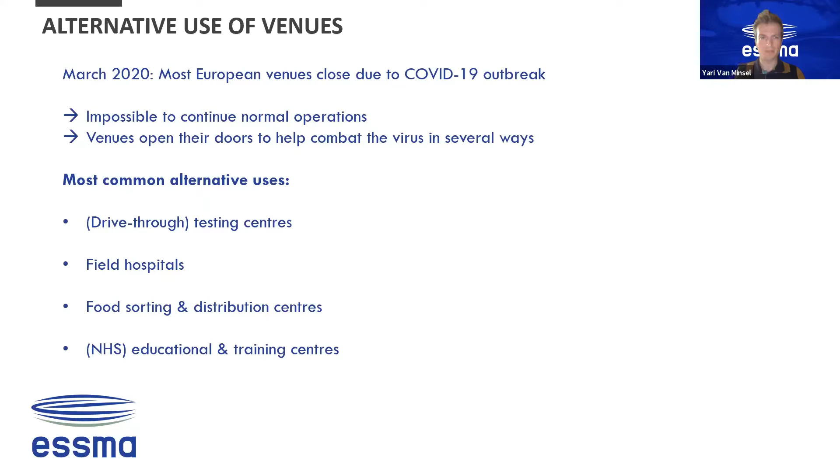They found several ways to do that, and all across Europe we saw different examples. For example, in Croke Park, we saw a drive-through testing center. We saw field hospitals in Principality Stadium, but also in the Maracanã in Brazil. We saw logistics hubs being set up, like in the United Center in Chicago, but also in the Bernabeu in Madrid.

We saw a lot of venues offering their infrastructure for the National Health Services. The O2 Arena in London was used as an education and training center. We also saw Chelsea FC offer their Millennium Hotel for NHS staff to stay there instead of going home and back to London each morning. So all venues around Europe were trying to offer their own kind of help to combat the virus.

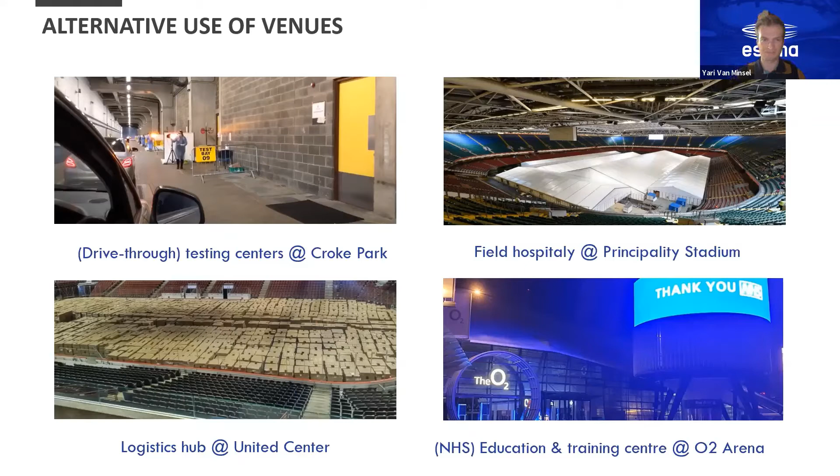As of June 2020, more and more countries were decreasing the measures around social distancing, and small crowds were once again allowed back in stadiums. Clubs were able to once again attract customers to the venue, and they had to find some creative way to do this and generate income from it. We also saw examples of that.

One example we saw in the US market was drive-in movie screenings at the Hard Rock Stadium in Miami, and the Olympic Stadium in Amsterdam did a similar kind of thing. This is a perfect way to generate extra revenue, use your stadium, but still keep in mind the measures in effect, like social distancing. We see them doing it with a drive-in system, but also outside the stadium with a large open-air patio, where people can still respect social distancing while the stadium generates revenue.

We also saw small exclusive business dinners on the pitch at FC Groningen, but also at Johan Cruyff Arena. And then, finally, we saw stadiums using their catering facilities and opening pop-up restaurants all around Europe—this is an example from NAC Breda in the Netherlands.

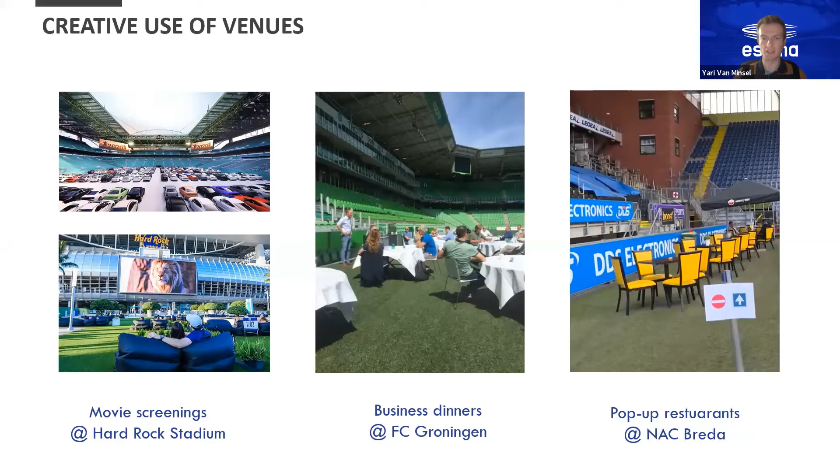Then we saw, in June 2020, that not only were venues being used again, but competitions were restarting as well. Most competitions had been temporarily halted, and some were stopped definitively. But those that were halted were restarting again in June 2020.

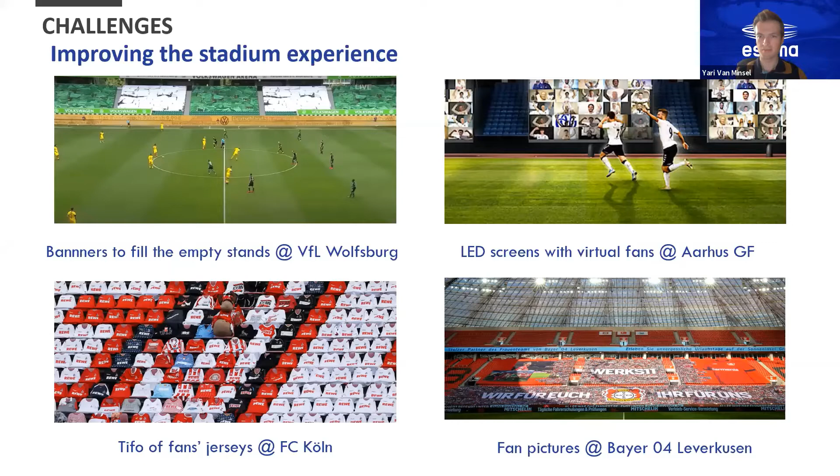Well, considering what you just saw, and knowing what Javier will detail afterwards, I find it interesting to bring three general considerations for today's discussion. First of all, I find it relevant how the football ecosystem has shown agility to implement substantial changes for the global emergency situation we have been living, mainly in two aspects.

One, the quick adaptation of stadiums as emergency situation infrastructures, with the examples from Yari, as turning stadiums into hospitals, movie theaters, COVID-19 testing facilities, etc., making them safe places.

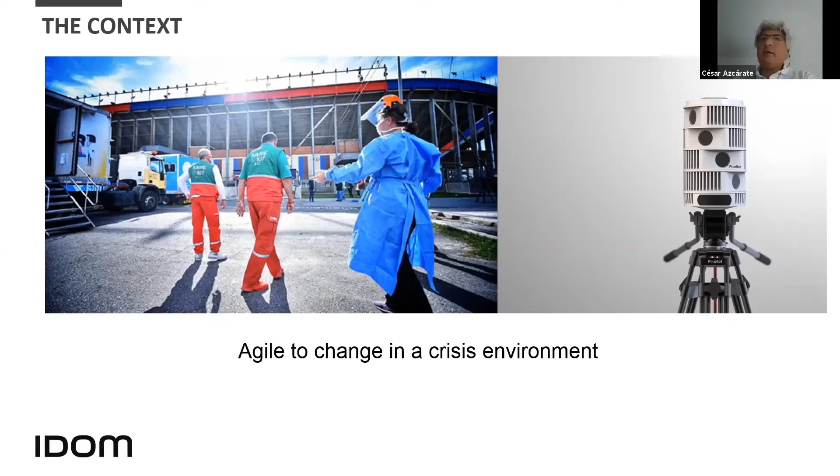And two, quick adaptation of technologies around the football ecosystem, mostly so far with the broadcasting technology, which provides the main incomes to football. We have seen stadiums being modified both digitally and physically to this new reality, the one of football without the spectators. This makes me think that our stadiums will be capable of adapting again to unknown and new situations to come.

A second thought comes from realizing the social responsibility that the world of sport has always had, and which has been further increased in these pandemic times. While the public authorities have an obligation to work on a line to adapt convention centers or to create new hospitals, I find great value in how stadiums, which are mostly private, have been capable of adapting with the same level of recognizability.

And to end with, the third comment goes to the media capability that the football industry already has, and which has been conveniently applied to solidarity campaigns, as the ones we can see here. This has the longest way ahead without any doubt. Such way ahead should be also capable of influencing the negative examples we are also seeing nowadays, as a prevention towards negative attitudes in celebration, for example, some days ago. Although good attitudes have also been seen, the media capability should be applied to avoid such bad examples.

Okay, within this frame, I will now give the floor to Javier Dávila, so he can tell us in detail which are the aspects to be considered to face the new situations, not just only in existing stadiums, but also in the stadiums to be designed yet, and which architects and engineers should evaluate and provide such services from now on.

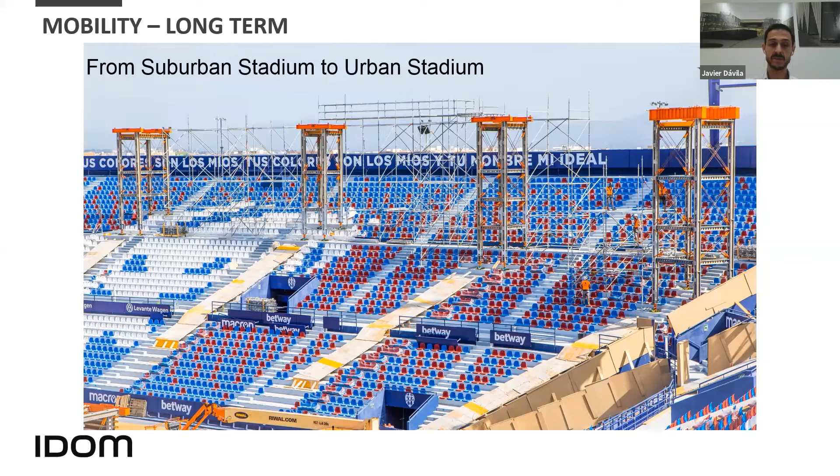But then, if we are talking about being in the city, then there is another issue that we have to address, which is the access to the stadium.

We put this example because this is a very open and friendly open space around the stadium for an access. In urban situations, this is not the common thing to happen. So the new designs for stadiums should be addressing these arrival areas and accesses to be dimensioned for this new interpersonal distance, not just as an emergency egress space as they are being managed nowadays, but more as areas where we have to engage our fans before the match and help them get into the stadium in a safer environment.

As we said, in a very similar thing that is happening in the United States venues, people have all these different attitudes to come earlier to the stadiums.

Well, those areas surrounding the stadiums, we should be addressing that design to allow for overlay requirements now for temporary situations that are coming from even temperature controls, screening. Well, those should be temporary. That's what we believe. But there is no need for renovation investments on those elements. But we should take that opportunity to actually revamp those areas outside our stadiums, provide that fan engagement that can bring the match day experience, that can allow people to come earlier, and well, with more comfort in a way.

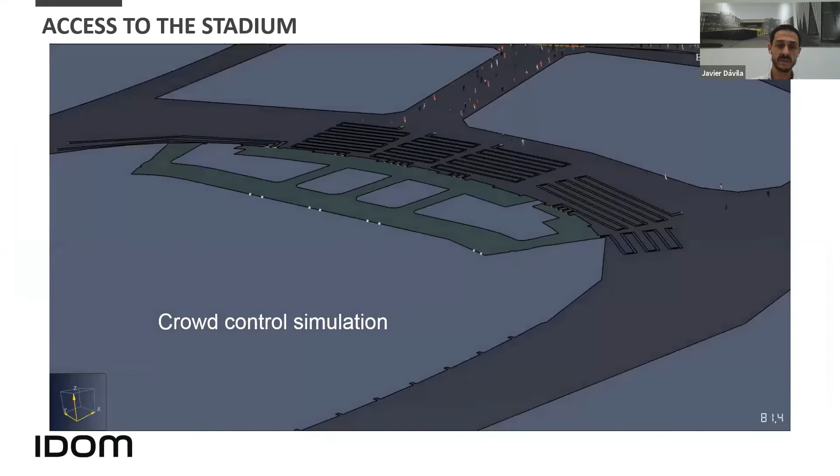Now I want to show you what happens with that kind of crowd situation. This is an animation of a simulation that we have done in our stadium in Bilbao, San Mamés. And what we can see is that the turnstiles will become the hotspot to access the stadium, where the social distance is the problem.

So what we see is that each stadium will behave differently depending on their own external conditions, and not just by the number of turnstiles or the actual flow of it. Even the way to display or to overlay the queues will affect, as we can see here in the image. The turnstiles capacity will be the key.

Yes, you can assess it from your actual data that you have right now in your stadium. You can already analyze how is it going to be working. And yes, we understand that some of the plans are calling for very strict timings to access the stadium, as we always do with boarding an airplane, for example.

Okay, that will work, but that will work only on the outside. It won't work inside the stadium, and it won't work either on helping build the match day experience. It will be quite an issue. So we have to have something outside the stadium and inside the stadium to help build that match day experience.

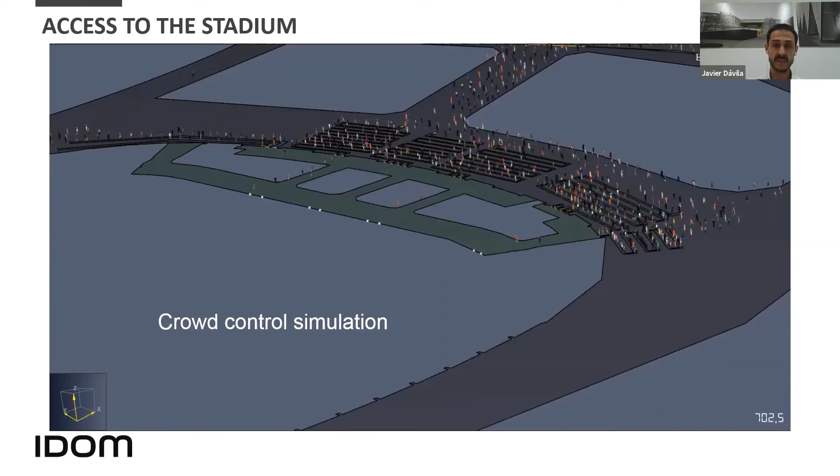We want to also check on the ticketing nightmare, as we called it here. Well, we have seen many solutions available in the market, but each club has to manage its own situation.

What we want to highlight is that the design for seating capacities, in our opinion, shouldn't be changed. The capacity limitations and masks are the right choice, probably, but the thing is not to fix it on a percentage of the total capacity. What we believe is that it has to be linked to the actual access flows, access capacities, and the way to move crowds inside the stadium, not the capacity itself, because those are just the general sanitary rules.

The problem doesn't come from the bowl; it comes from the circulation inside the stadium. So from that ticketing nightmare, we will quite soon come into full capacity again, as soon as vaccination is available. That's why we say there shouldn't be dramatic changes to the layout or display of the seating stands.

And we all want to have this back, because we understand the revenue generation, the fan experience, and the home advantage that Jari was highlighting before. What we have to do is allow for more flexibility of those seating capacities, for flexible sections at different levels, but not change the capacity numbers.

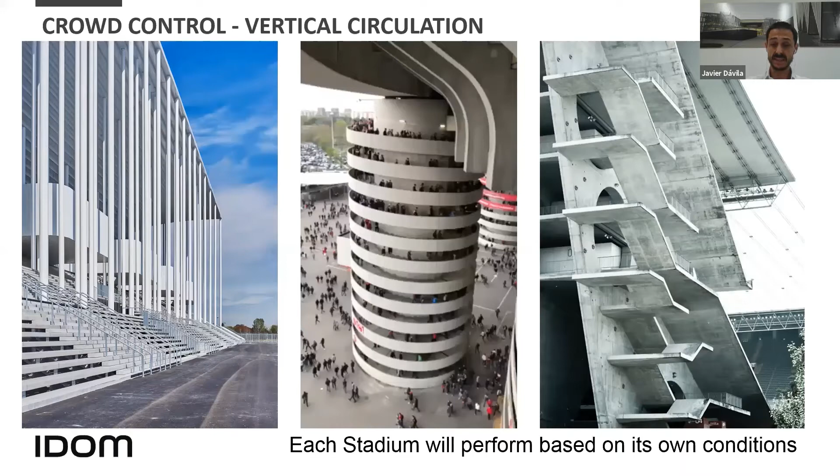You might have narrow passages. You might have constrained landings. You might have certain situations that other stadiums won't have. So the key is to work on your stadium plans and set those routes that will allow your fans to come safely, considering the stairs, the escalators if you have them, and the lift capacities. All that should be managed with a deep analysis of your own conditions.

We have another video here with another crowd control situation, which is halftime. Halftime flows are the real problem. Yes, we have seen that you can control people coming in by making them come earlier. You can keep them safe on your seating stands.

But when halftime comes, everyone has to go to the toilet. Everyone wants to go to the bar to get something. That is the real problem, and it won't be solved just with stewards, because it could be very complicated to manage several thousands of people moving around.

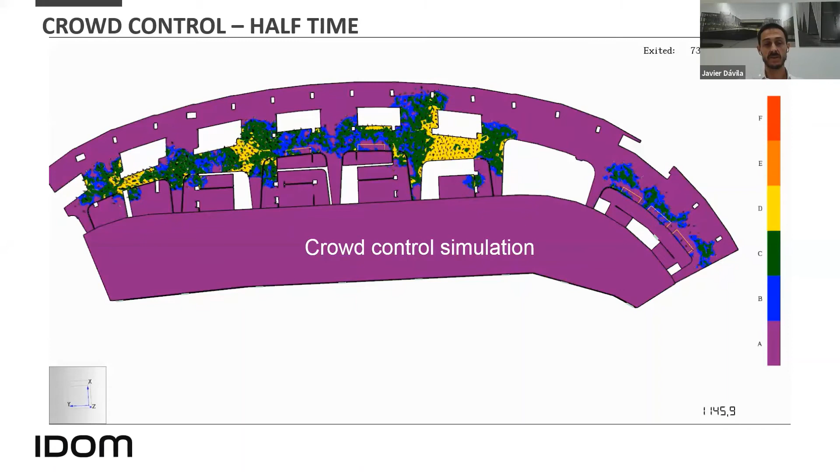In any case, you can see all those poor avatars wanting to go to the toilets. Then the obvious thing is the technology we all think about, which is open access to toilets, contactless configurations of the elements there. That has a very small impact on your investment, and no real difference on operational costs, but that could be really required. We'll go to that later.

In the end, what we can see is that these large circulation areas are probably going to be key. We have to improve that ventilation.

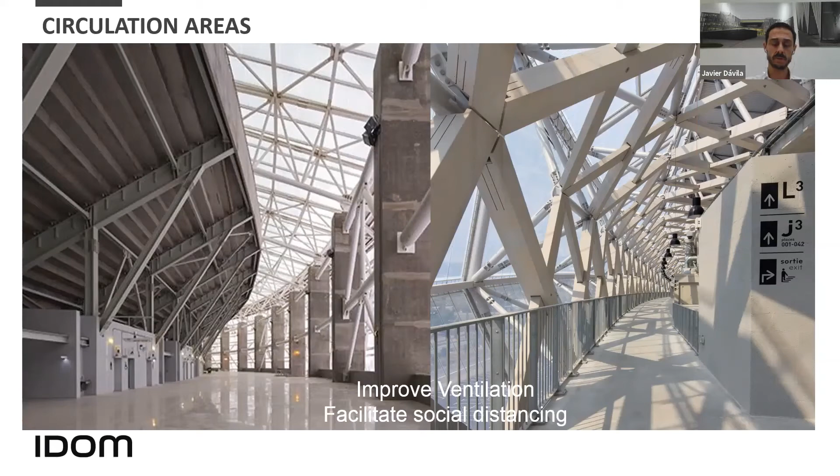We have to facilitate social distancing, and even with very open and good ventilation stadiums like these ones we're showing, you can have narrow spaces that will require analysis if it's existing, or rethinking when we go to a new design.

And then there is a question mark here: would there be a growing interest in having more boxes, for a more secure feeling, instead of sitting together with the rest of the fans? Well, we don't think that will be coming, but it's quite probable that these kinds of more private spaces would be interesting, maybe not as final implementations, but more temporarily.

What we can see, as Tessa said, is that the adaptation we have seen in our stadiums is really amazing. What we have to think about is how to make that kind of situation a near standard, so stadiums should probably from now on be designed to undertake massive sanitary alarm situations, but also to treat spaces to be more flexible than they are now.

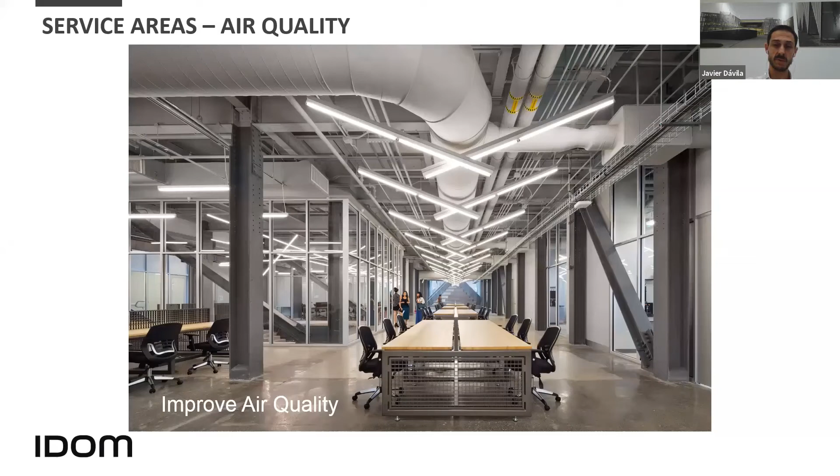Then one thing our engineers are also highlighting is humidity control. Sometimes it's not set, depending on our location, but we consider that a must from now on, and to have it on a more humid condition. Usually indoor spaces are treated at 40% humidity control; let's move them to 60%. With that, we will increase the performance of our ventilation systems and create a safer environment for air quality.

When it comes to other areas in the stadium, like toilets and locker rooms, the improvement of ventilation and air quality goes exactly the same. But we have some additional things to consider, like contactless design, which we're always saying is very simple, easy to implement, and makes a lot of sense even from a sustainability point of view, for saving water and other elements.

It would be interesting if we could implement additional automation systems, like toilet flushers that only flush if the lid is down. That small thing can provide a much safer approach to your toilets and locker rooms.

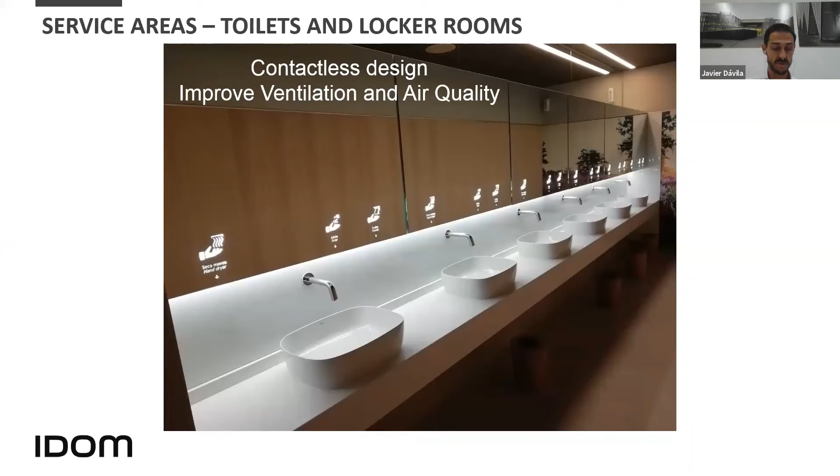And when it comes to locker rooms, we bring an idea here: ultraviolet germicidal lamps. This is used in operation theaters, and this system is widely used in healthcare systems. We believe it's very interesting to consider them in our locker rooms and indoor situations.

Ultraviolet systems can be used in many locations, even on the air handling units at the air conditioning systems inside, to disinfect those ducts. They can be set to disinfect small spaces when they are not in use, so the ultraviolet lamp only goes on when the space is empty, or as they do in operation theaters, with lamps that are safe for people to be there at the same time.

So all these systems, we believe, have a good way to go in our stadiums because they have been tested and improved for many years in healthcare systems.

We also want to highlight what we already said with Jari about technology at the stands. We have seen that approach to fan engagement to not lose the home advantage. These things don't have to stay forever, we understand it's a limited effort with limited investment in this very limited situation. But post-vaccine, when capacities go back to normal, some things we could implement and analyze now are very beneficial for the future.

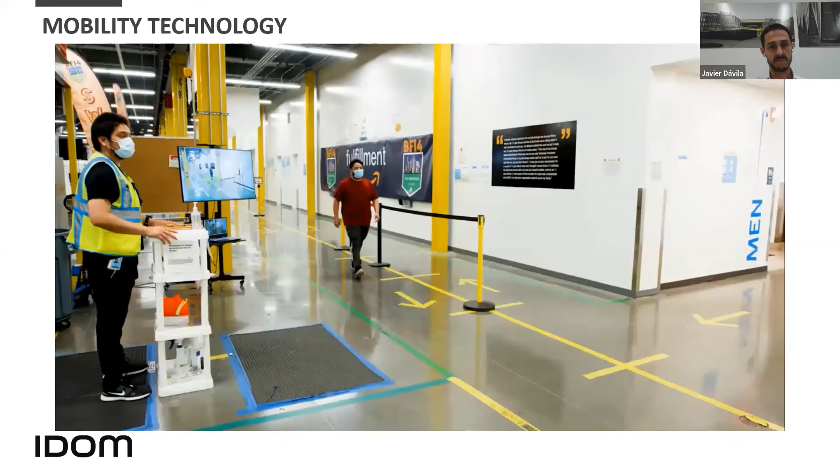We also want to understand that technology analyzed for mobility is going to be helpful, and we see a place for it here. We bring the example of Amazon with their distance tracker. We can see this is quite easily implemented in our stadiums.

We have plenty of circulation areas with screens broadcasting our internal feed, so they can fit this too, helping our fans move a little more safely. And not just this, also apps controlling the systems for entering the stadium, assisting the security personnel we have.

When talking about safety technology, there's this issue of being too intrusive. The most intrusive systems will be less accepted by our fans, and they'll also be the most expensive investment to make. So our advice, from a design point of view, is don't go too quickly into implementing very intrusive systems at this moment - let's go with overlay and temporary situations instead.

For example, temperature controls integrated into the turnstiles make sense, and are probably the least intrusive thing we can implement in our stadiums.

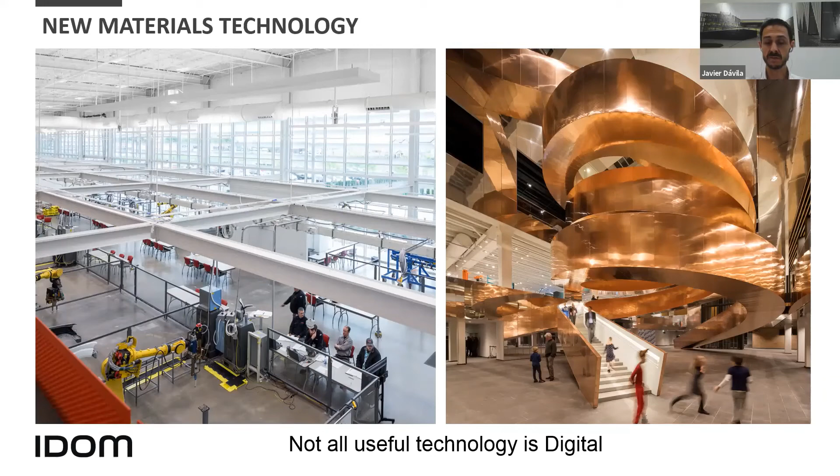And why not recover some traditional materials, as shown in the picture, materials which are traditional and already have antibacterial properties, like copper. We can see room for technology bringing us back all those traditional materials as well. So these were our ideas.

So we want to summarize by giving you the key takeaways. As we said, please consider your stadium location, whether existing or a new design idea. Consider it within the city and with the city. Liaise with your city council, manage your surrounding areas, and consider that your location makes a lot of sense, even more now, because it has to affect the transportation system around you. That will bring you to consider sustainable renovation of existing stadiums, instead of moving away from the city center or discarding them because they are not fit for purpose anymore. There must be a good interest to consider that now.

When you go to an existing stadium, please consider assessing your existing conditions with crowd simulations and deep analysis of your conditions. For those elements, partial renovations will play a big role: small implementations, temporary implementations, contactless technology. We have been touching several aspects with partial renovations that will probably make a lot of sense in existing stadiums.

Always improve your air conditions, no doubt about it. Just go for it. Put the right amount of technology, not too intrusive and not too definitive, because our advice is not to go for large investments at this moment. And as we said, for a new stadium project, everything on this list has to be explored, because all of these elements are the ones that will be affecting the designs in the future.